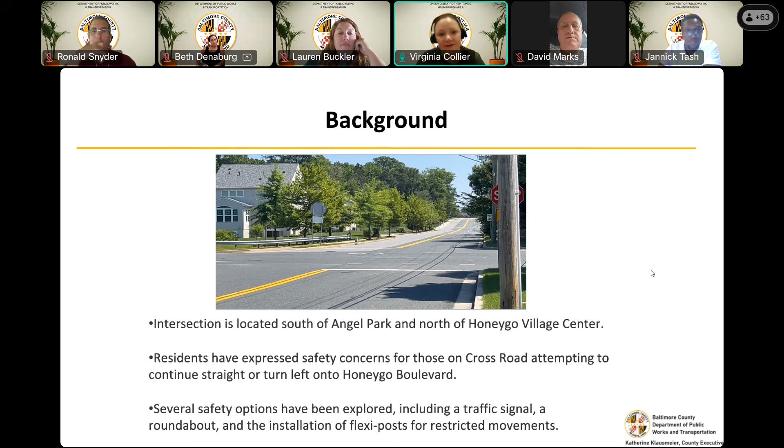Our existing conditions out there, we're located south of Angel Park, north of the Honeygo Village Center. It's 2 lanes on Honeygo in each direction. North side of Honeygo is divided. It's approximately 20,000 vehicles per day, which is, as Councilman Marks said, fairly heavy traffic on this corridor. It's classified as an urban arterial, and it has a 40-mile-per-hour posted speed.

Cross Road is a collector road, that's its function, and it only has about 1,800 vehicles per day with a posted 30-mile-per-hour speed. The only control existing at this intersection is a stop condition on Cross Road. So the speed and volume of vehicles on Honeygo make left turns and through movements fairly difficult for drivers on Cross Road. It leads them to take unnecessary risks after waiting on Cross for acceptable gaps.

We do have a crash history in this corridor. There were about 17 in the last 5 years, and that's 17 recorded crashes, I'll state. So these are all police recorded crashes. So obviously, if people have fender benders and don't call in the police, that might not be captured fully here. Most common types of crashes are straight movement and angle crashes. So anyone on Cross attempting to go straight, those appear to be the most common. So those are the existing conditions.

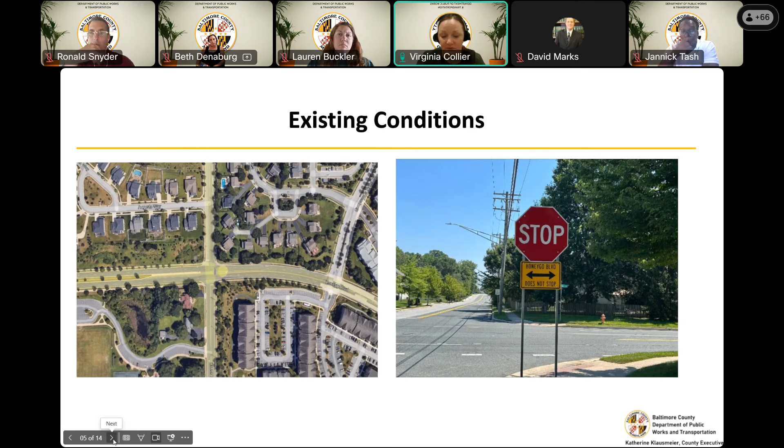As I said, we did explore a couple different options. The first one we looked at was a signal. So I'm going to pass it on to Chris right now to discuss the signal. Hi, I'm Chris, Division Chief of Traffic Engineering.

Yes, we have evaluated this intersection many times throughout the past years, most recently in 2019, 2022, and 2025, where we collected all-day traffic volume data, and we analyzed them against the signal warrants that are laid out by the Federal Highway Administration. So the warrants are criteria used to evaluate whether a signal is justified for installation. And there are several other different categories. We call them warrants, and we evaluated it against each warrant. So warrant number 1 was 8-hour.

But before I get to the warrants, we just want to say that unjustified signals could increase risks if a signal is not warranted and is installed. The risks are excessive delays on both streets and increased rear end crashes because of the stop queuing, rear end collisions, and also an increased risk of aggressive driving because of signals. So moving on, I will explain each warrant and what we are looking for and whether they were met.

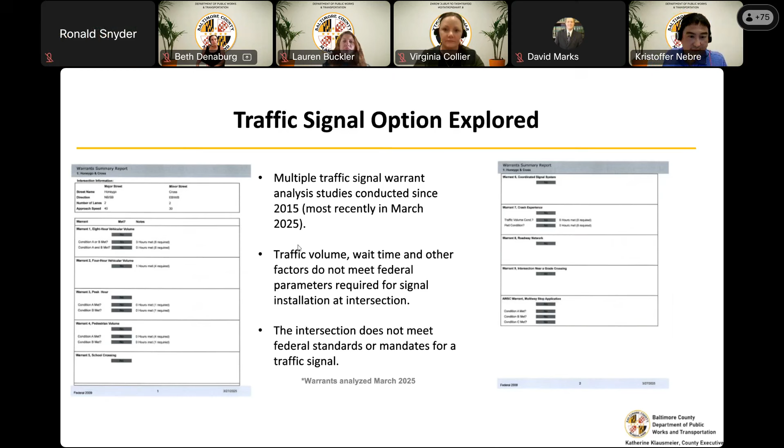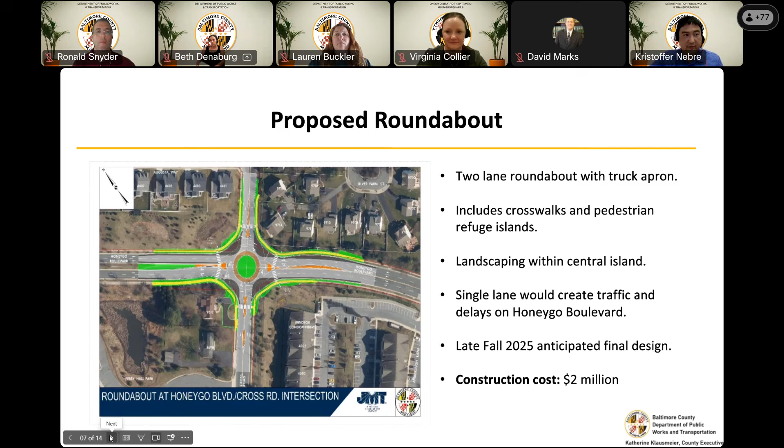So as of now, without the roundabout in place and trying to still address the issues at hand, we have proposed alternatives. The alternative we have proposed is a flexi-post installation. Something of this configuration has been installed in the Baltimore County area. If you've been to, I believe it's Perring and Cedar Hill, you can see an example of this, where flexi posts have been used to restrict certain movement of traffic moving onto a major road.

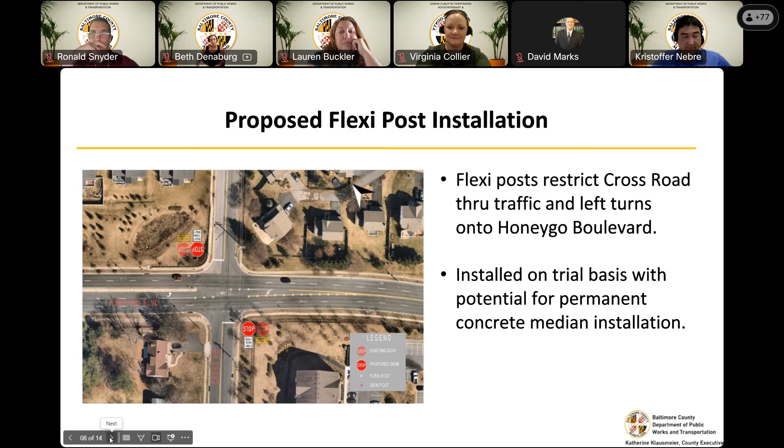So in this example, you see that flexi posts restrict the through movement along Cross Road and also left turns onto Honeygo Boulevard. So here's a simulation. Okay, there's the flexi post where cars would travel, but it will only restrict the movements without going through the flexi post. So left turn movements are still allowed along Honeygo Boulevard onto Cross Road. However, from Cross Road, they are now restricted to right-out movements only. Okay.

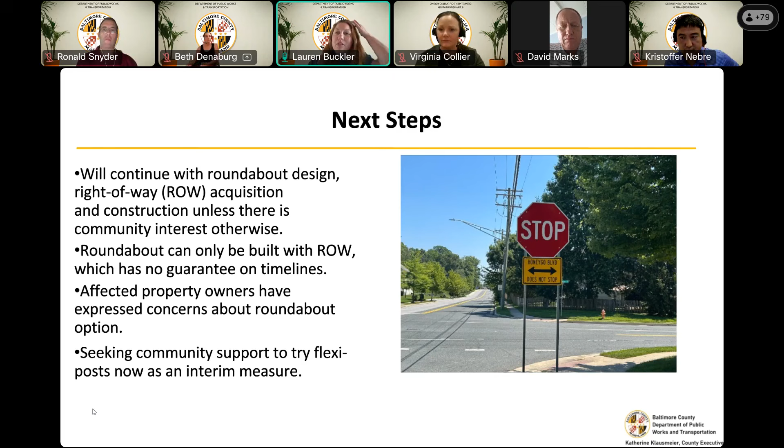There's also been a lot of questions in the chat on flashing yellow lights. A flashing yellow traffic light has to meet the same warrants as a regular traffic light. So again, traffic lights are off the table. It's not an option. It doesn't meet the volumes unless something were to change drastically in the volume of traffic on Cross, which would probably have to be major development to ever get to the volumes that would make it meet. And I guess I will ask Ron and Beth to pull any of the questions that we didn't touch on that are not traffic light related, since again, doesn't meet it, can't do it.

Okay, I will start looking over the questions here. I'm going to start at the top, just kind of work our way down. Give me a second here. Has the intersection of Honeygo Boulevard and Gunpowder Farm Road been considered for a traffic signal? Much more traffic here than on Cross Road. That has been brought up, and we are actually going to conduct a study this fall when school gets back in.

How many vehicles coming out of Perry Hall Farms and the Winder condominiums compared to Cross Road? We haven't studied that intersection, so we can't give you those numbers at this point. But as Chris just mentioned, we're going to study that other intersection, which may be the one that's being asked about in that question.

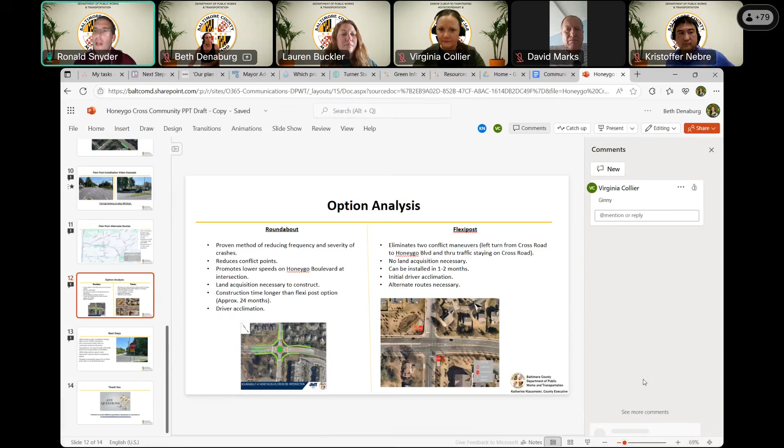There are 4 more developments going up right off of Honeygo. One is off of Cross. Gerst Farms will have a large number, and off of Ryan Meadow will be single family with more cars. Will you reevaluate again? I think we'd have to look at where those roads are and where they enter.

I think one of the other chats I saw mentioned the one down by Joppa View. That wouldn't impact the traffic on Cross with where that development is routing. We can look at the other ones that are being mentioned.

But the other thing to mention is every time there is a development, the development comes through DPWT to review the traffic study that goes with the development on where it's loading traffic, what it's doing to intersections, and then if we require improvements related to that development traffic-wise. So every development is analyzed when it comes through the county.

How often were these traffic or warrant checks performed? Was it one day of viewing the intersection and measuring these warrants, or was this over the course of multiple days? It was one day, but it was the full day of traffic.

We talked about the traffic lights. I believe it was mentioned that there were 17 reported crashes over a 5-year period. In any years, have 5 or more crashes within a 12-month period? So the crash history is part of the warrant analysis for the signal. Again, it doesn't meet. We've looked at the crash history, we pulled that data. One of the calculations in the warrant analysis is the crash history, and it doesn't meet in that criteria, but it doesn't meet in any of the 9 criteria. Okay, we've talked about the warrants.

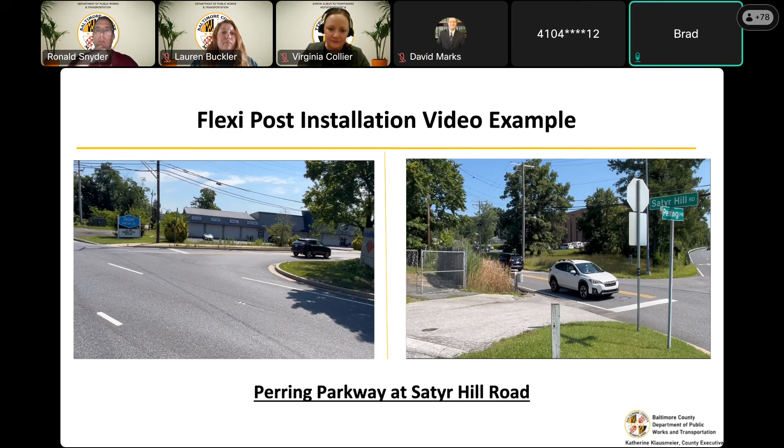And with flexi posts, I also don't understand how any of us would get out of our development. And now you're looking at us doing U-turns by Angel Park, where there's a lot of kids running around, and then there's fields with lacrosse and soccer and everything. And that just makes more of a headache. And I believe other people will get in accidents there. Please go back and review these questions from everybody. I think they're really helpful.

So I think the primary question we're seeing a lot of is that it seems to be a one-day snapshot of when traffic was captured. At least I'm going through the questions now, and that's what I'm seeing. I will say we've done this, Chris, how many times? 9 times we've looked at it over successive years, that there's just not enough traffic on Cross that would generate meeting any of these warrants. So even if we did counts again over a multiple day period when school is in session, the traffic data is still not there to support a signal.

The other thing is the crash history in this area. To install a signal, the crashes that are occurring have to be correctable by a signal. The crashes we're seeing out there today are not correctable by a signal. So that is why the roundabout was proposed, to give people a chance, when there's traffic coming on Honeygo, that people on Cross can now navigate across the intersection and turn left.

Yeah. And that's just where we are today, is that it would need to be a 2-lane roundabout, which is impactful to right of way. So we heard from the community, the local neighbors, as we were starting our right of way process, that they are uncomfortable with how close the road would be to their homes now. So we presented the flexi post as an option, and it is something, as Lauren said, we could do as a temporary. We can try it out temporarily to see if it resolves some of the issues we're seeing. I think that was the primary question I've seen.

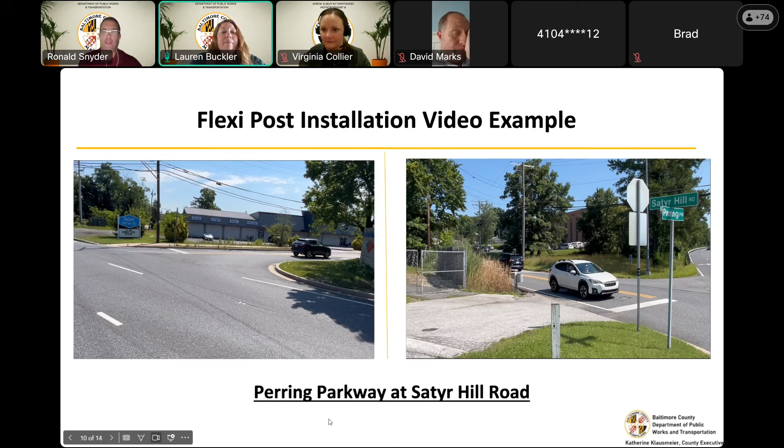I apologize. The flexi posts are what we have not done at this point, and we want to hear feedback to see if we do it as a temporary measure and see how that works out. And then we would reassess that and have another conversation. We would continue down the path of the roundabout the whole time, but reassess the flexi post. We're looking for interim solutions. I'm sorry, I misspoke. No. Can I make a comment?

Yeah. Sure. This question is... Yes. Cool. Virginia, I just want to get clarification on one of your statements a second ago. You mentioned when you reviewed the crashes, I think you said the traffic accidents couldn't have been solved by a light. Is that what you said? Yeah, the type of accidents we're seeing would not have necessarily been resolved by a signal.

Gotcha. And it would in turn, I think, create more rear end collisions. Okay. And that's just going based off of highway safety manual data. Sure. As someone who lives on the intersection and could test the traffic and the accidents there, I feel like the majority of drivers that are getting in accidents are ones coming from these offside roads trying to get onto Honeygo. And so when they're trying to get across the lane or even to merge onto Honeygo, that is when the accidents occur.

So if they had a protected green signal to go and everybody else had a red signal, that could allow those users to cross, which is where the majority of these accidents are happening, from the drivers on both sides of Honeygo trying to cross it. And again, I'll just reiterate my point that even if you study the intersection 5 days a year, that's still not sufficient to understand the full traffic of that road. So I think there should be more days where the traffic is reviewed, because I don't think 1 or 2 or 5 days a year is sufficient.

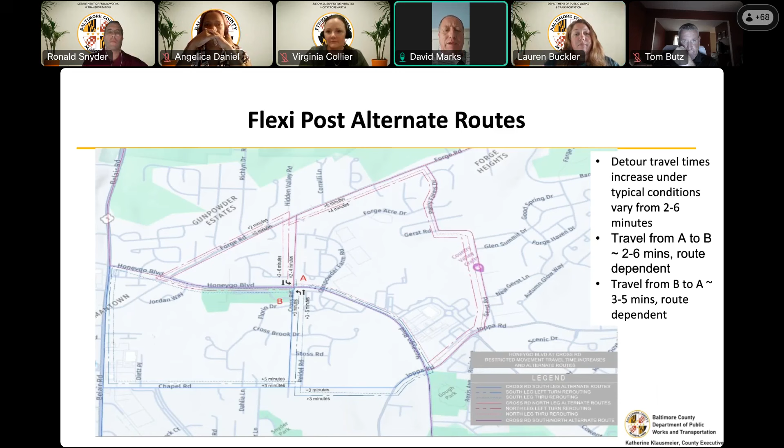Lauren, can I add something too? Sure. And in some cases, we do work with the appropriate agencies to make sure that we can have these lights or circles go into place. So, for example, when the Klausmeier development was proposed, we talked to SHA and said, can we finally get a light there? It met the warrants. And SHA put that light in at Klausmeier and Belair. So, I mean, there's times we will also do our very best to be proactive.

And also just to mention in a similar vein, down Honeygo where Joppa View is, there's a development going in across the street. We pinged BCPS about that. We also have quarterly meetings between Public Works and BCPS to talk through projects that align. BCPS was already considering making changes to the entrance at Joppa View. So we coordinated with them to make those adjustments in line with where the development was going to be.

So it'll make it more likely that that intersection would qualify for a warrant versus having those roads offset from each other. So there is coordination from multiple angles. I know it's not always obvious that that's happening, but there is a lot of behind the scenes coordination to make sure there is infrastructure to handle the need.

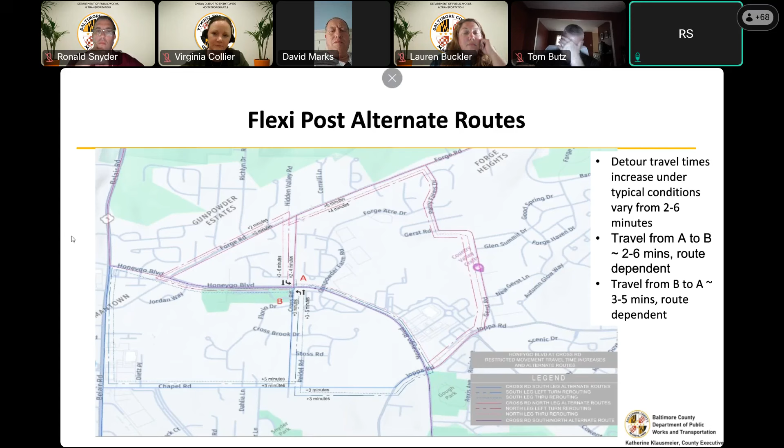I appreciate it. And as a resident on the Chapel side, so between Honeygo and Chapel, I was involved in an accident there. I wasn't the driver. The driver was a Perry Hall resident who was unaware of the risks associated with making the left turn. I just want to gain some clarity around how the flexi posts would eliminate the issues with left turn and going straight. I believe I missed some of this, so I apologize. Is that going to prevent drivers from making a left or going straight across Honeygo?

Okay. So I do think there are a lot of factors that are associated with the issues there. One, I do agree that speed is a huge, huge factor. And I think something put in place, in addition to flexi posts, the roundabouts, or whatever you guys move forward with, around speed, I think we really, really need to put something in place to slow the traffic down. So if there would be a consideration for that, I think that would be helpful. I personally have kids who are going to be driving in the next few years, and I will not allow them to go cross Honeygo or make that left, because I think you are taking your life into your hands, especially during busy hours.